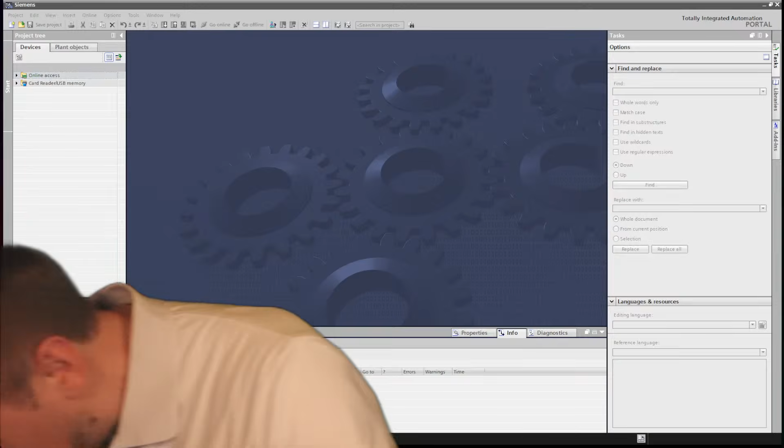Let me take notes. I don't really use it that much, but I do have a little notebook here in which I will now take notes of attendance. This is like if I do programming or HMI design or such, you can't see it because of my green screen. Let me do the green screen, I don't want to fiddle with it, this will break everything. Oh there, you could see it. I do take programming notes on there, and I make plans, like class diagrams and stuff. This is my little notebook here.

Watching from Berlin - hey, that's not far away. Everything okay now, perfect.

So I do have my little notebook here, I will take attendance, I'll go through the list afterwards and see who's there, which country is represented. We even got Kenya, fantastic. Turkey, yeah, so much, so international. It's all kind of in those time zones. Bangladesh, that's quite far. That's LA, okay, LA is the furthest away. I think we can't get much further except for like Australia or stuff. But LA, that is really far. I've only been in the US one time, for a training that I gave myself, in mechatronics.

Where was I - I passed through Newark on the way, had a little layover in Newark, and then I was going to Pennsylvania, Pittsburgh. Good times. Paderborn. Ah, Rwanda, so much Africa, that's pretty cool. I also see French, I've been to France a couple years ago, to Paris. I tried speaking French but my French is really terrible. I had a very bad grade in school in it, so I'm not going to try and speak any French or Spanish.

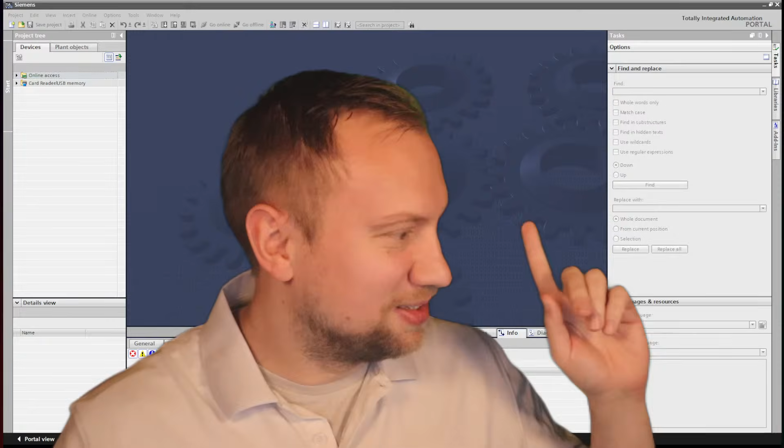So story time - there's always story time in the beginning. So before my time, before I started with PLCs, with automation, there was - I think it was aimed at the Iranian nuclear program, let me see if I don't get this wrong. The only big virus that was ever aimed at... and now we're going into TIA Portal.

Oh, Constantine, I've never been there. India, of course, India is missing from the list - of course, India is represented as well, obviously has to. Is that going to work?

Yeah perfect, I don't want to show you my... I mean it's okay, why, where did - what did I just break? Oh my goodness, yes, of course, Stuxnet, that's the one I want to talk about. It was Iran, right? United States, Israel, it was aimed at.

Some said it was a political virus developed by a government, and I think it was official that the US government aimed it at the Iranian nuclear program.

Stuxnet was aimed at the Iranian nuclear program. The very sad thing is that it's the only known virus for PLCs, the big one. The unfortunate thing is it always gets related to Siemens Step 7 software, so it's not TIA Portal, but the older PLCs. I'll do programming in TIA Portal very soon, but...

Story time started here. The very fascinating thing is how Stuxnet was actually organized. Let me take Paint to take notes and stuff. Paint is perfect.

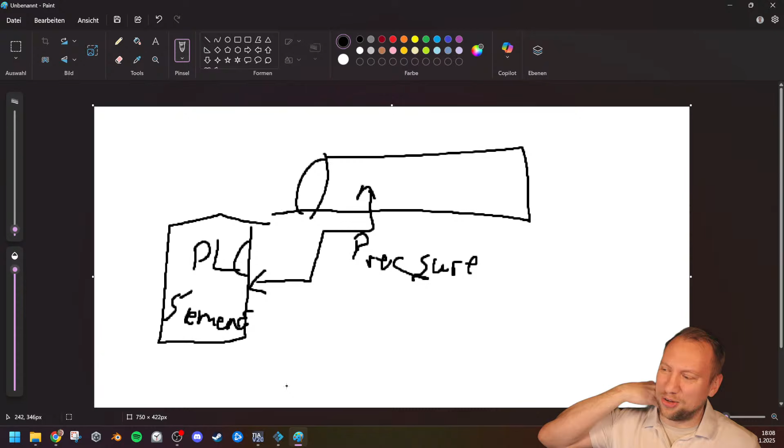I don't know the movie, but if you Google Stuxnet, the virus, you will find a lot. The Wikipedia article is pretty huge, and it's all about one of the biggest, or the biggest, PLC virus, which was specifically aimed at Siemens PLCs, developed by the Bush administration.

It's literally well known nowadays and well documented that it was political, pretty much cyber war. Fascinating, very fascinating things. Good.

That is why you should always keep your firmware and PLCs up to date. That's why there's an update every now and then, a safety update. It's not always just safety, it's also features, but that's definitely something that happened in the past.

Stuxnet functioned by targeting machines using Microsoft Windows through the networks, and it was brought in using USB sticks, and it was so easy. Nowadays, of course, with all the cybersecurity, it is much more difficult.

The worm infected over 200,000 computers. Goodness gracious, this was great.

So we've got Tunisia zooming in. Mexico, we've already had Mexico. Egypt, perfect. Good evening, everyone.

Yeah, so this is not the main topic here, but that was so fascinating, I wanted to read more about it. I watched the documentation, like an hour, or maybe 45 minutes. It was pretty good. Interesting stuff.

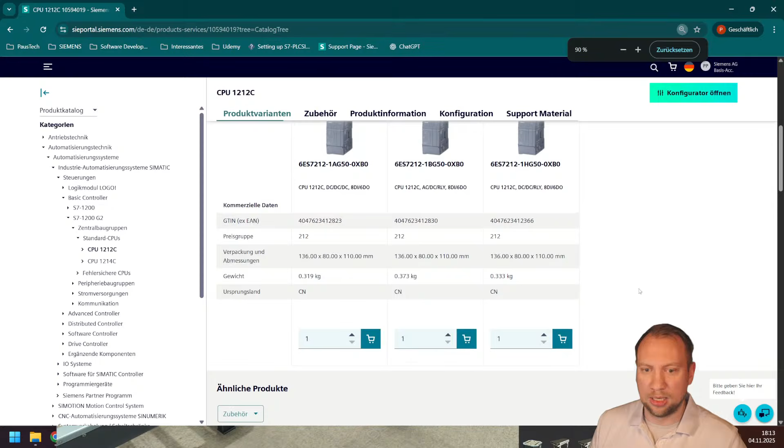I don't know, let this charge first. There we go, is this with pricing? Why is it so zoomed in like crazy? No, there's no pricing because my account is kind of suspended. Not suspended, but it's not really there. But the newer PLCs like the S7-1200s, you can get for a cheap price, right?

G2, let's get a G2 starter kit. They are not as expensive as you might expect. If I look at this, for example, a starter kit, I can get a starter kit for like 300 euros. Of course, we all have different currencies, but 300 euros, that's like, I don't know, half a cell phone here, right? And this includes TIA, the basic TIA portal, an HMI screen, the PLC, some basic electronics, as you can see there, and you can get that quite cheap.

Yeah, Siemens is nowhere as expensive as Allen Bradley. Yeah, Siemens can be expensive though. The most expensive thing for Siemens is that there is this bandwidth. An S7-1200, you can go for the cheapest if you want, 200 euros. That's, I don't know, that is me inviting my family to dinner once, and I could buy a PLC instead, right? The most expensive ones are like a high-end car or a medium-end car, like an Audi or so here in Germany. So there is this bandwidth, you just have to know what to choose. But Siemens offers a load of bandwidth.

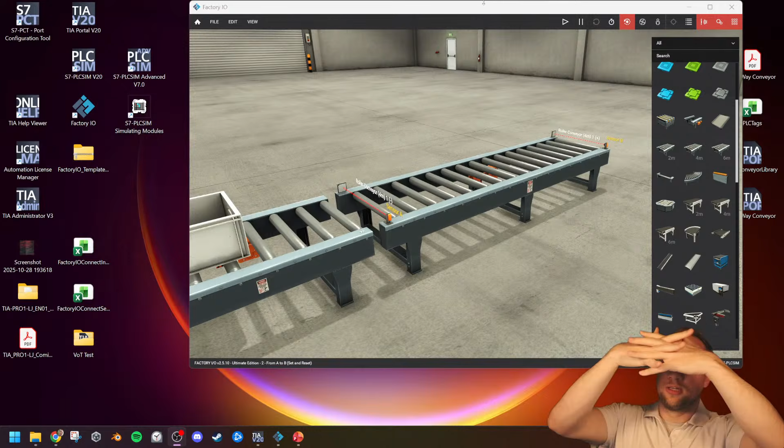Siemens tries to incorporate everything in one software, which I will show. It's quite nice.

Can we change Factory IO with CoppeliaSim? I don't know that one. There's Simit, but I don't really like Simit too much, personally. It is good, I've worked with it quite a bit, but personally, for education, I don't like it too much.

Okay, so here for our system, I want to show you a couple of little tricks. We have this, right, a simple roller conveyor system. How is this thing called? It's a roller conveyor system.

Advanced is just for 1500 controllers, yes, it doesn't exist for 1200s. So this conveyor belt right now can't go forward, can't go reverse. I can manually force this in the software, but manually forcing it is like short-circuiting it. Of course, that's what our PLC should be doing. Nothing exciting, right? This is right now not doing anything exciting. It's cool, it's a cool software, it's a very simple system.

What I want to do, inside of TIA Portal, I've got a couple of projects set up to test this out. Nothing is going to work. I want to actually open up an existing project from my desktop. Where is my desktop? There it is. So I'm just opening up the project that's there for this.

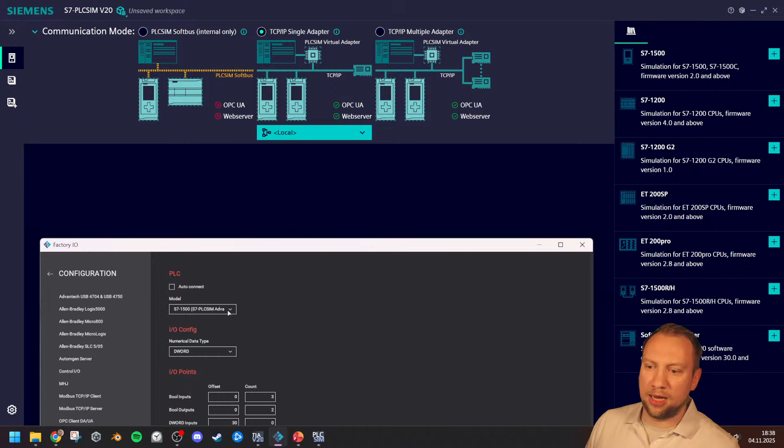Now, if I choose PLC Sim Advanced and do PLC Sim Advanced here, they will just communicate, no problem, no fix necessary, very nice even. This is new. If you only have PLC Sim, the normal version, you don't have that. Now, on the other hand, this is also the main feature of PLC Sim Advanced. This is interesting, definitely interesting.

If I have PLC Sim Advanced, you can see that I have this option of 3 different adapters possible here, of the online access. And fascinating, what you can see is if I change this in PLC Sim Advanced, it also will change in the normal PLC Sim version. This is quite fancy because I'm changing the global network communication for all of my TIA components on my PC.

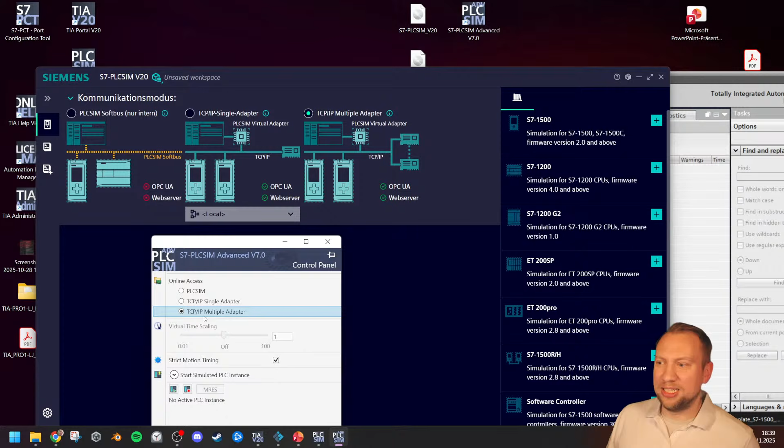Which means, and this might now be interesting for Arnaud, this is probably new. This here, I don't cover this in any course. This is the first time I talk about this. This means I do not need PLC Sim Advanced anymore. I can close this up, and I can now also, I will have to click on the exit button here.

I can now do everything here within PLC Sim, which is great.

Have I ever dealt with PCS7? That was my first Siemens software that I worked with. Yes, I worked as an engineer with PCS7.

PLC Sim version 20 runs with PLC Sim Advanced, yeah. But that was my big problem yesterday when I was setting up everything: if you don't have the PLC Sim Advanced license, TCP/IP single adapter and multi adapter, you cannot choose them. They're grayed out, you can't click on them. This is license gated. So this is PLC Sim Advanced now, like it has been integrated here, which is pretty cool.

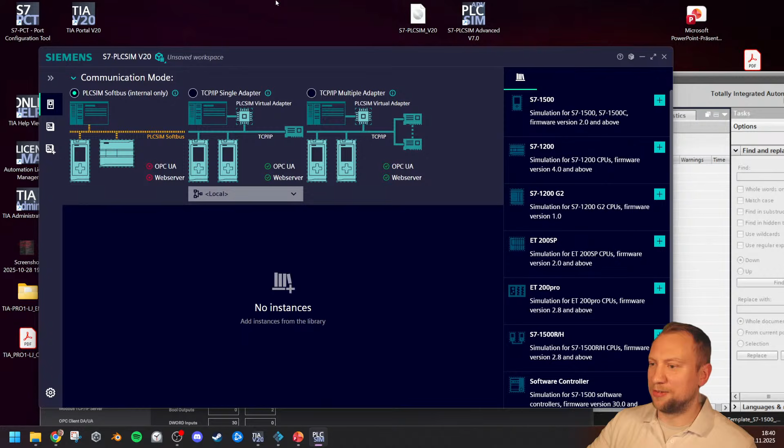They changed the interface of PLC Sim. They are working on this, integrating more and more things into it. But now I kind of like the state it is in right now.

If it doesn't have any bugs, which it does. I experienced some yesterday when I tested everything. So now I do have this like...

PLC Sim running here, right? I do have this, and I just want to connect it to Factory IO, which is now... I will actually close PLC Sim for very specific reasons. I do have set my Factory IO here to communicate as S7-1500 with PLC Sim version 20 or newer.

So I want to connect. If I click connect, PLC Sim isn't running. What I have to do is select my PLC, and now I will run PLC Sim from within TIA Portal. Selecting the PLC I want to simulate, and then clicking on the Start Simulation button up there. And yeah, because I'm simulating, and this is...

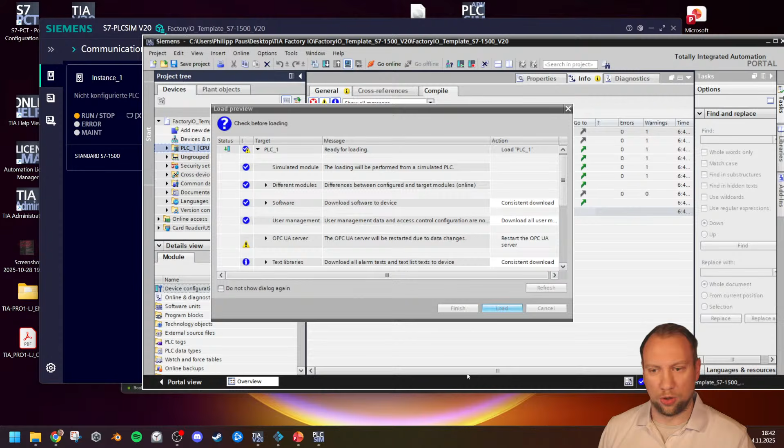And now I can download my PLC here. Sure, so there's nothing new, I didn't explain anything, I was just downloading a PLC program. There, hey Shepard, hi. And I will also start my PLC, so you can now see it goes to run mode. And now, very, very fascinating.

What I think about digital twins and virtual commissioning: we are not... they get more and more important, but I think there has been too much investment in it. It's good topics, important topics, but too much focus is put on it. From my perspective, it is good.

Downloading the program before? Nah. I could have also created the instance here manually. Yeah, that would have been recommended, especially if you have PLC Sim Advanced. But this is the way that I do it right now.

So if I now click connect, it will still not work, I think. Yeah, because as I have said, if you've been listening, you know that this external tool, Factory IO, cannot communicate into the PLC Sim softbus here without any fix, without any problems, without any issues.

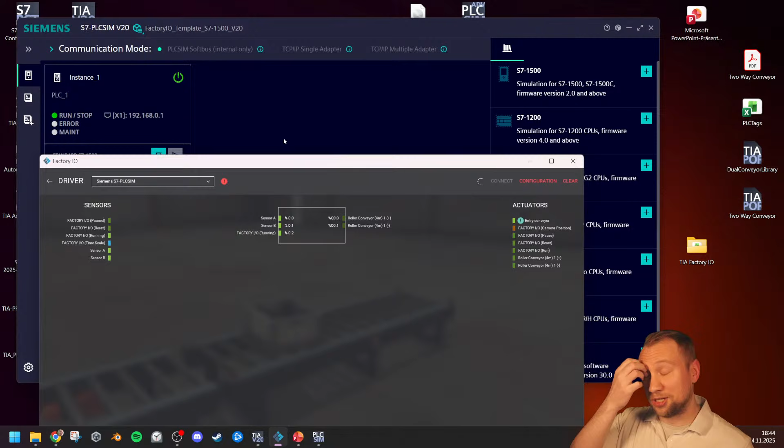What I could do... yeah, digital, it depends on, it's a whole different topic. Digital virtual commissioning is a whole big topic. It's cool, it's fancy, and there's a lot of money in it, but to do it efficiently, you don't really need that.

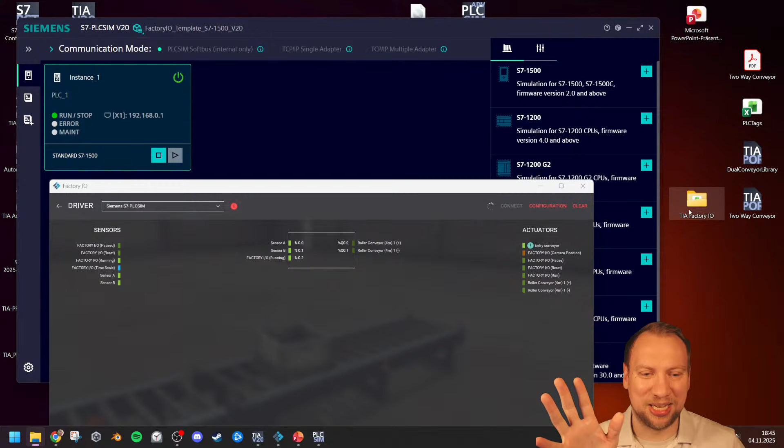Which it can't, because the softbus is not open. Now I don't know who found this out, I tried to find the solution, but there is a very, very funny thing for me that Factory.io can do. And it is this, and I hope I am doing it correctly.

You can download this from the Factory.io site. There is a connect sequence, connect in and out variables, and a connect sequence which I will need to import, I think, first. So the first thing that I will do, and I hope I do the process correct, is into TIA Portal. I want to import the tags here from Factory.io.

And cool feature, oh, they are auto imported.

So they've already been imported here. I will show another feature later on. So I would need to import those tags to TIA Portal. And it's already happened there.

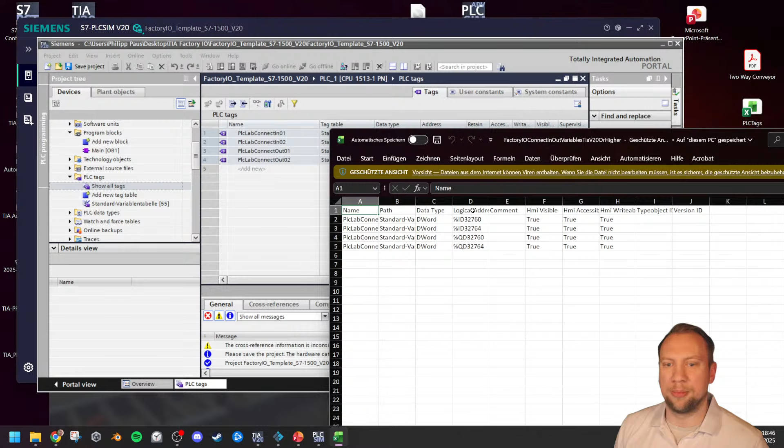They are already there, and I literally do not know what they do. I don't know why they're there. They are somehow on an input double word, 32,760, and on very high input double words. I don't know why. I don't know what that's going to do. Is it FC9000?

If we would go directly with TCP, it would be working. So I could easily set this up with PLC Sim Advanced, no problem. And the very fascinating thing with this, if it is FC9000 or SFC actually, then I would have to read - then I can find myself into it. That's a good hint, I'll look and see if that is what it is.

Now, the very interesting thing for me is I will have to - we didn't import it, I'll show you how to import tags in a second. One cool thing that I don't know what it is - I didn't work with S7, with S5. I'm too young for those, not too young, but I've not been around in engineering for those.

What I have to do, and Factory.io supplies this - all of this is not too important, but it's very fascinating for me. They provide a sequence. Now this sequence, I don't need that. All of this is not necessary for PLC Sim Advanced. There is this sequence - in this sequence, if I press play, it will turn the input peripherals and the output to those values.

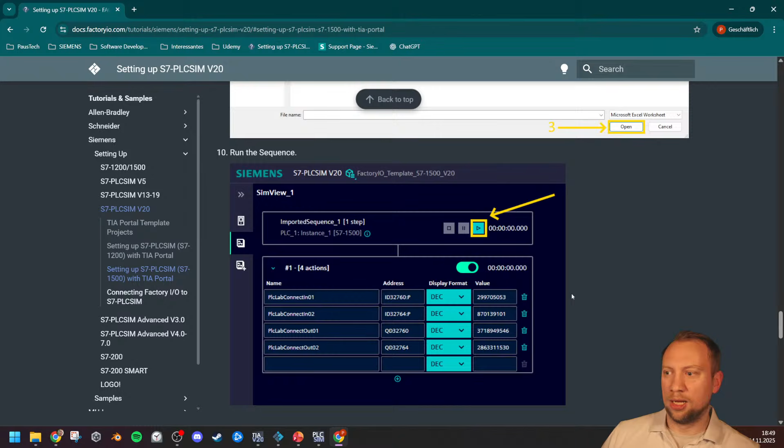So all of this is described in - and that's not important because it's Factory.io specific. You don't really have to use Factory.io. All of this is documented, and I just followed the documentation when I tested things, right? And that is a learning factor - a lot of times, I have to also follow scripted documentations. Like documentation, press this, press that. I don't know, sometimes we just have to.

Can I take a look at the value converted in BCD? Yeah sure, I can - like string doesn't help much, but let's see. BCD you say - yeah sure. If I want to look at those values, let's import them into a watch table and then we can see if those numbers mean something to you.

Why can't I monitor? There it is, there we go. I mean hex, right? You want BCD? I don't know, can I not change this to - I thought I can change it. I can change this to - there it is, BCD.

Does that ring a bell, Arno? For me, it is complete. I understand it works - it opens somehow this back door in the simulation. Looks like magic numbers. Yeah, exactly.

No, it works, right? And now, as long as it works, I don't mind, right? I've tested this. Now we do have the PLC sim connection here up top there, I can see the check mark. And now let's get - so PLC sim, right? So we talked about PLC sim simulation here.

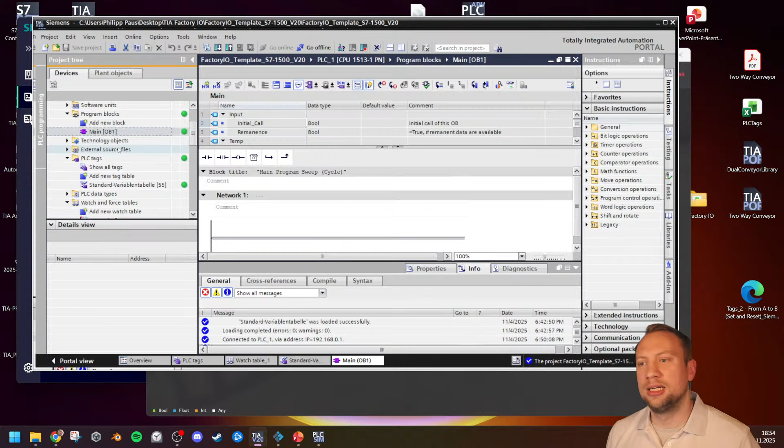Now what I can do, if you want to import tags from external software into TIA Portal, it's very easy. Inside of TIA Portal, I go to show all tags, and there is literally an import button on top. If I click import, I can now import those tags. On my desktop, you don't need to see what's there, but I have a lot of nonsense there - this tag list. And now I have imported them successfully.

Easy as that. Edge wants to be relevant. Edge is an okay browser. If I wouldn't be used to Chrome and wouldn't have everything on Chrome, I would probably be using Edge. It's an okay browser.

No, we don't need the communication function block anymore. That was an old thing. Now with version 20, we just need those tags, we turn them on, and it works.

How else would crypto get mined? I don't even want to think about how much crypto got mined with my PCs because I always go on sketchy websites and I just don't care.

Anyway, I might be your hero. Why do you have PewDiePie? Is that PewDiePie as your... it looks like. Do you look like PewDiePie? Looks like your... what's it called? Your faceplate? I don't know how it's called. Your icon. Kind of looks like it. But it's very, very tiny for me as well.

There we go. Now I have imported those tags. So we have very simply exported it in another tool and we can import this here inside of TIA. Extremely simple. How difficult are PLCs? Depends, but I would say they are pretty easy.

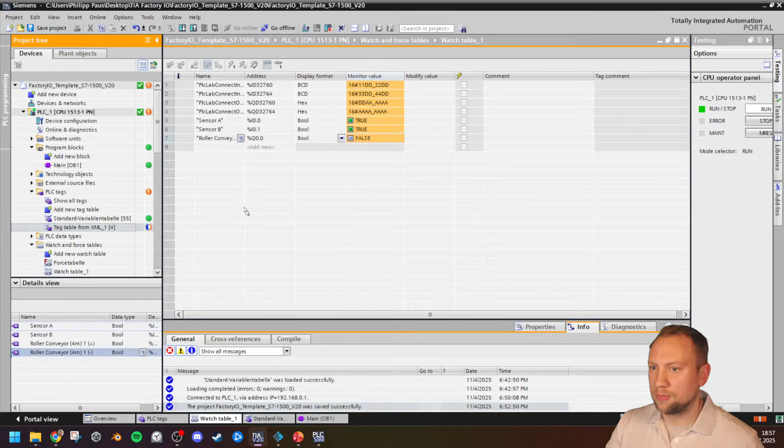Where are they in my tag table that I've imported? I can just pump them in here. Now I can control my system directly with this, all without downloading the PLC even once.

If I double click here... now my screen is, by the way, I usually use my screen in a not so zoomed way, so I'm not used to this. Or double click doesn't work. Right mouse button, modify to 1, modify to 0. I can control the conveyor belt directly from here, easy peasy.

Faceplates are pretty cool, yeah.

I'm not electric, I'm an automation engineer. My background is electrical engineering, my degree is in electrical engineering, but I somehow landed in automation. Or I would even say nowadays, I landed in education even, with some, of course, engineering background.

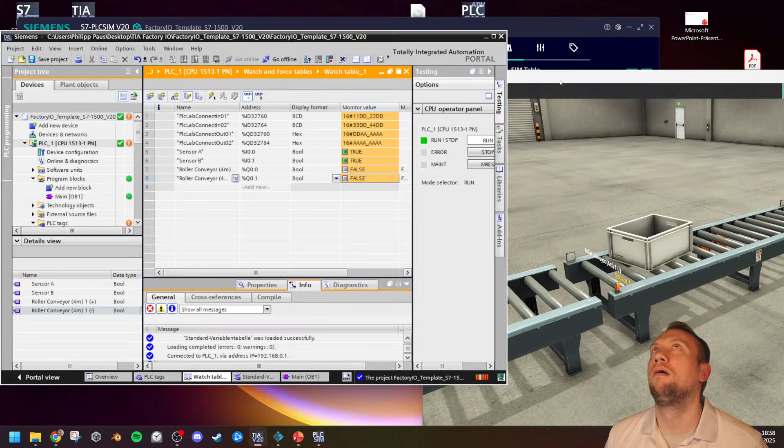There we go. So now I could program this, right? The conveyor going back and forth or something, which I don't want to do. What I want to do, it's not going to work. I didn't test it. Maybe it will work. Let me test something. Because right now, what I want to do is an additional thing.

And it's going to be our second big topic now that I haven't talked about, that I haven't started, which right now we have this. What I want to do is, so we're currently using the sketchy backdoor. I want to do something else. I want to switch over to PLC Sim Advanced. Now, what I want to do with PLC Sim Advanced, I want to connect this to another software.

And I'm going to read the chat there again in a second. Sorry, I'll be with you right in a second there.

It's pretty new, it's very cool, something called VoT, the view of things. A VoT application.

Let me see. The view of things, which is going to communicate with PLC Sim Advanced, which is not 100% correct. It is going to run inside of our PLC. So it's going to be a part of our PLC. It belongs to the PLC hardware.

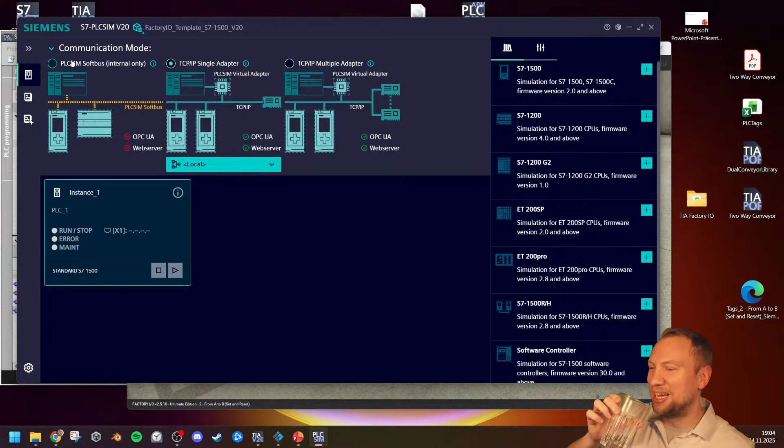Yeah, but this is why I can't use this. I have to use the standalone PLC Sim Advanced.

It should be available here, right? This should be available, but I don't know why I can't. Wait, oh, there's a different one. I found it.

Maybe this works now. Oh god. I selected the PLC, there's the license type. Do you want to run a standard PLC? Do you want to run an advanced PLC? Oh god, I tried this for like 20 minutes yesterday and couldn't make it work.

I've paused it, it's just... you're currently working with a trial license. I know, it's okay. Oh no. Okay, we will try this.

I can't believe it. I thought it would automatically detect if I use TCP/IP single adapter, and automatically detect the correct license type. Why doesn't it? Yeah, exactly what you said. That should be an automatic selection.

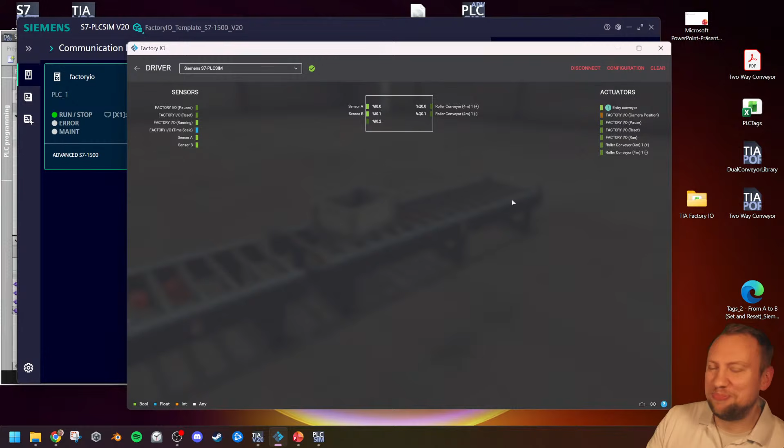Right now, Factory IO is communicating with PLC Sim Advanced, and I didn't know. So yes, we don't need PLC Sim Advanced anymore. It's integrated here, you just have to choose this frickin' license.

Yes, pretty much, if you don't have PLC Sim Advanced, you can. An HMI can also be simulated to use the same simulation bus as the normal PLC Sim. That's correct, but you cannot use an external HMI, like a physical real HMI, for it. But a simulated HMI will work fine.

Should work. Now let's see if my network communication still works with this. I think I need to re-download and reconnect because now we're not using PLC Sim. And that's actually an important thing — we're not using the PLC Sim simulated internal network anymore, we're actually using the virtual Ethernet adapter, the real physical adapter. I do hope this one will now work.

I'm going to show all compatible devices, search the network. We'll see. Yeah, the name of your PLC Sim — if you're using PLC Sim to communicate with Factory IO, it has to be named Factory IO.

I don't know why I even know it, but yes, it has to be. This is so stupid. Backdoors and backdoors and backdoors everywhere. Oh, goodness.

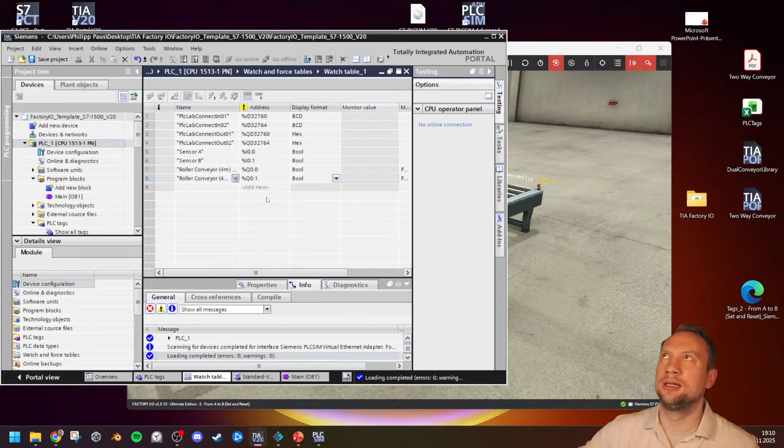There are many issues. That's why, just for a student and for learning, PLC Sim and the HMI simulation is fine. For engineers, you will have to go with the advanced versions. You want to go with those.

PLC Sim worked, but it cannot connect to Factory IO. The Factory IO connection needs the name Factory IO. Everything else worked, but not the communication with Factory.io. This is somewhere in the documentation. I don't know, it's stupid.

Okay good, now that we have this and everything is connected through a physical network, right? Inside my PC, there is this physical network that is really a network right now that is communicating. So I could also have an external HMI now, and this external HMI can communicate with PLC Sim Advanced and also with Factory.io, right?

By the way, that is one of the reasons why I have never really continued with my factory simulator software, is the networking is a pain in the ass. Setting it up and using it, like getting the right protocol, is very, very difficult. I try to find better ways than those stupid workarounds. And you see, even Factory.io, they make millions a year by selling the software, right? Even they couldn't find a better way than this.

Yeah, it's a shit way to do it. Yeah, I agree.

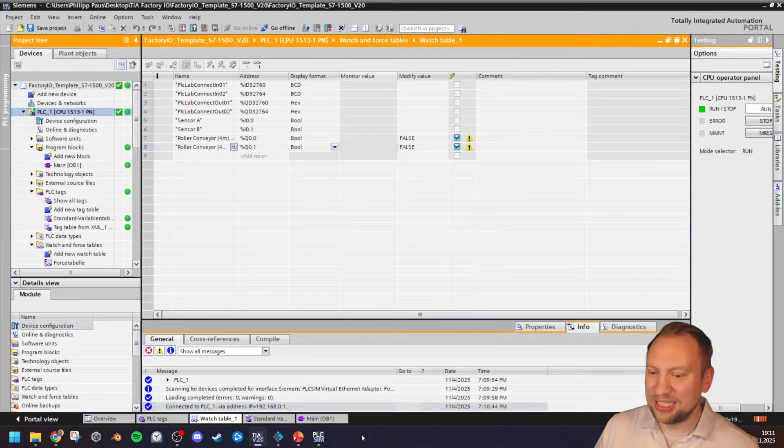Yeah, exactly. The instance name of the PLC Sim Advanced instance has to be named Factory IO. Don't know why, that's just how it is.

Okay good, now the main topic. So second big topic started, or third, fourth big topic. Let's see, the real interesting topic now, like everything else also interesting, it's just expert talk, right? Is the following, and that is what is a really cool feature now of newer PLCs.

Now, the first thing that you have to be aware is that your PLC hardware has to be newer than firmware version 3.0. So this one right now is version 4.0, so it is available, right? And it is this feature here, web applications. If I would change this, which I will not do right now, to a firmware version of 2.0 for example, the web applications would not be here. This is available at 3 and higher.

Inside of the web applications, what I can do is create a view of things application, a VoT, which I asked ChatGPT, do you know what VoT is? And it gave me a completely different name, but I know view of things from the official Siemens documentation, and I was like, yeah, there it is. You see, it automatically creates this view of things, which is an HMI. This HMI right now is inside of the PLC, as you can see. We have the PLC, and it is part of the PLC right now.

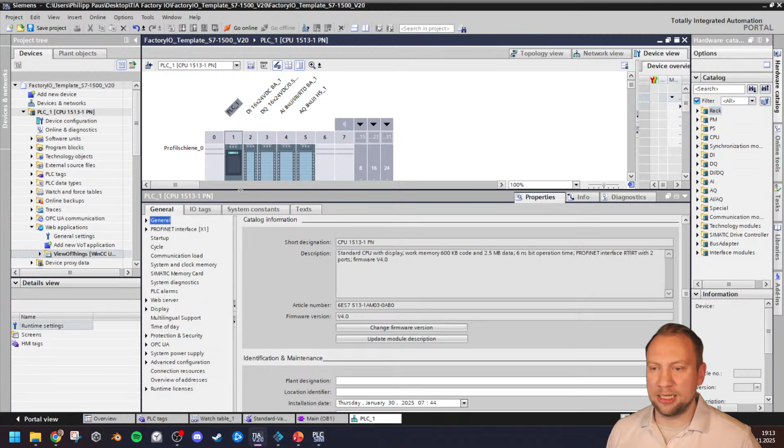So this view of things application is now inside of the PLC. It's not inside yet because I haven't downloaded or compiled anything, but it is a feature that we have inside of the PLC. Now, what I want to do in there is add a new screen, like an HMI. This is like an HMI setup, WinCC Unified setup though. If you have never touched WinCC Unified, it is a little bit different than the standard WinCC.

That sounds complicated. It kind of is, but also kind of isn't. So what I want on here is quite simple: I want 2 switches controlling the motor forward, motor reverse. So we're not talking about HMI too much, right? But I want to have 2 switches. Where is my text? I put text on there. Forward, and also a reverse.

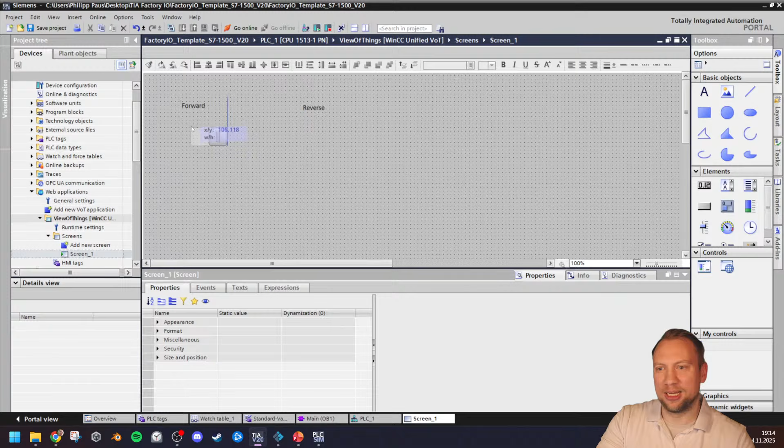Nothing really exciting, right? Now those 2 I want to link to my PLC outputs here, so my PLC tags. I have to be aware that those PLC outputs, forward, reverse, have to be accessible and writable from the HMI side of things. Not HMI, but actually this uses the web API, so it's really a web application. So now I can use them on those buttons, on those switches.

So I want to have this, and then the switch state, right? The switch state is controlled by a tag, and that tag is, of course, if I have forward, I want to have PLC tags, the forward, the plus. Nothing crazy here. I set up an HMI screen. This HMI screen has 2 switches. This switch here is displaying and controlling the switch state by a tag, and it's the plus tag, so motor forward, so I can directly write on the output. And this one is going to do the same thing with the negative tag with the reverse.

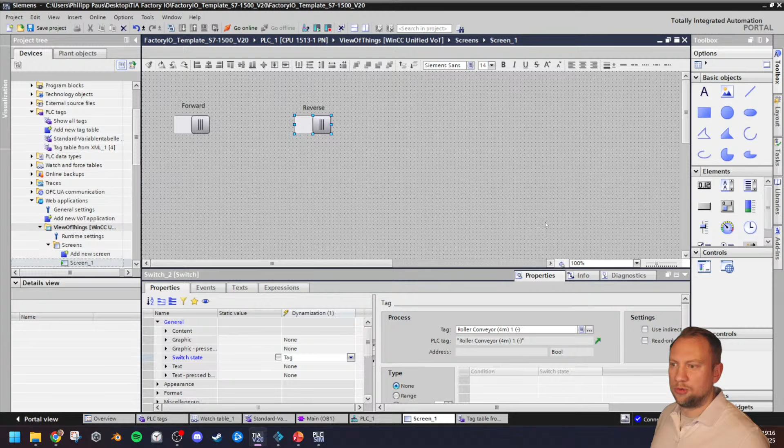Is it cyber securized? That's a whole topic in itself. But yeah, it is, using OPC UA. It is as safe as networks can be, pretty much. They have done the same with using web source. It is the only logical way nowadays, I would say.

So we've got this now, right? Those should control the motor going forward and reverse. Now, for the view of things, and this is what I do not like, you might expect this is now part of the PLC, so obviously, if I download the PLC, it is going to download this feature as well. No.

Absolutely not. It is seen as 2 devices, so to say. So we have to download, yes, but we have to compile the HMI itself, and we have to compile the PLC itself. So before I can download the PLC, there will be - no, view of things is also available in earlier versions. It has to do with the firmware version of your PLC.

Now, if I download the PLC here, it will actually give me an error. And let me see - when you simulate the PLC, you'll use the PLC sim virtual adapter. Yeah, exactly, Marcos. That's if I do use PLC sim, but I'm right now using PLC sim advanced, so I'm grabbing into my network adapter.

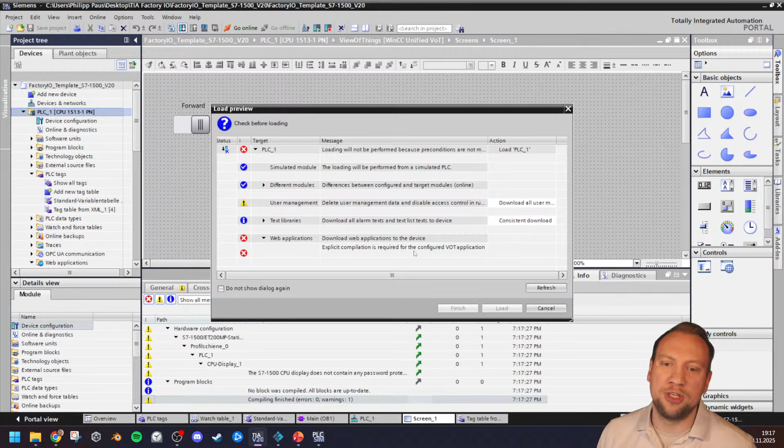Yeah, there we go. Look at this. Like right now, the web application - explicit compilation is required for the configured VoT application. So I actually have to go in there and compile. It's up there. I usually press the button, or right mouse button compile is also possible. Right mouse button compile, rebuild it all. I'll have to do this every time I change something on this HMI.

So it wants to be treated as its own software part, as its own device. I don't really like this. It should just give me the option when I compile the PLC. However, it's fine. If that's how Siemens decides to do this, at least it gives me the info. Yeah, exactly, logical controls. WinCC Unified has advantages. It is great, actually.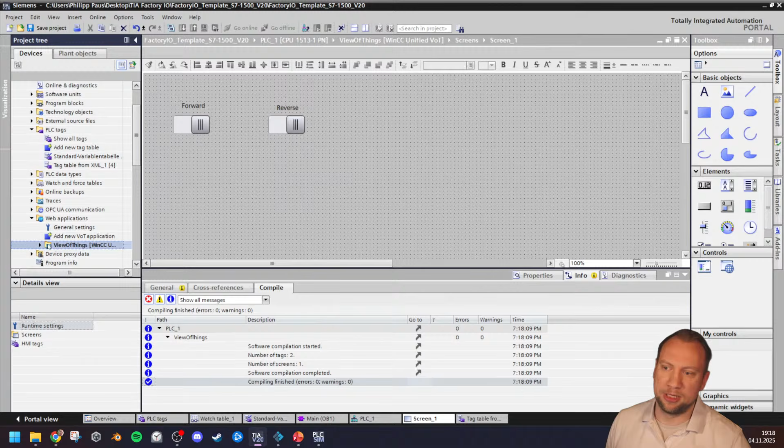Now with this view of things application, right? Now I have it. The one thing that I still need to do is on my PLC, I still need to activate - where is it? The web server, which is a hardware feature of my PLC. I have to activate the web server here. Security note, and of course, cybersecurity - it lowers the security. Yes, that's the hint there.

Now in this, I want HTTPS, sure, why not? I don't mind. I still need to do one more thing. No, is it? Oh, God. Oh, goodness. Yeah, it's a different thing. I still need to do one more thing, which is really annoying. A huge difference. And now I hope I don't break everything. I will, most likely. We'll see.

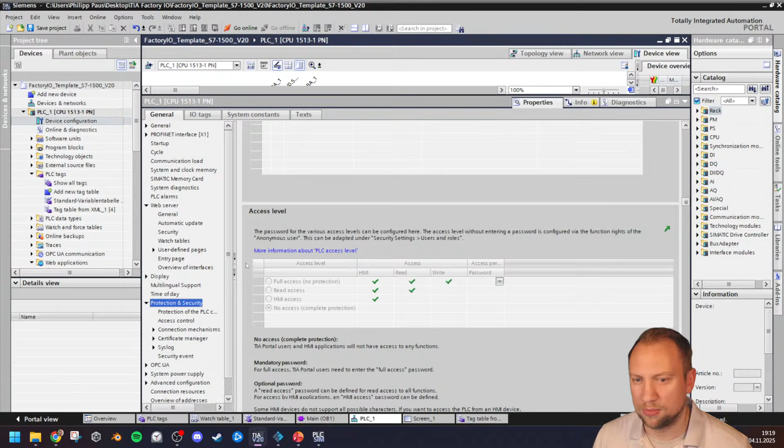Let me check one more thing that I wanted to. Wait, no, it's in protections. I'm stupid, it's in a different tab. Oh, yeah, different. One more topic, right? Which belongs - it all goes together here.

So we do have now the HMI here, which I will download, and then an external browser can access this, theoretically. Now this external browser, I'm scary? You say I'm scary? I'm not scary. Boo.

So now, the problem with this is we will need—not a problem, actually it's good—we will need access rights to this. We cannot just penetrate into the PLC here, that's of course not possible, all of this is protected. What we need is the access right to go in there and work with the HMI, which is a web application. So we need the correct rights to access the web server application.

Now those access rights, I could make a whole video just about this. But the access rights are an important thing, and they have been changed between versions quite drastically. Right now my PLC has firmware version 4.0, which is how it's going to be in the future. So if you want to be prepared for the future, this is how the access rights have to be adjusted.

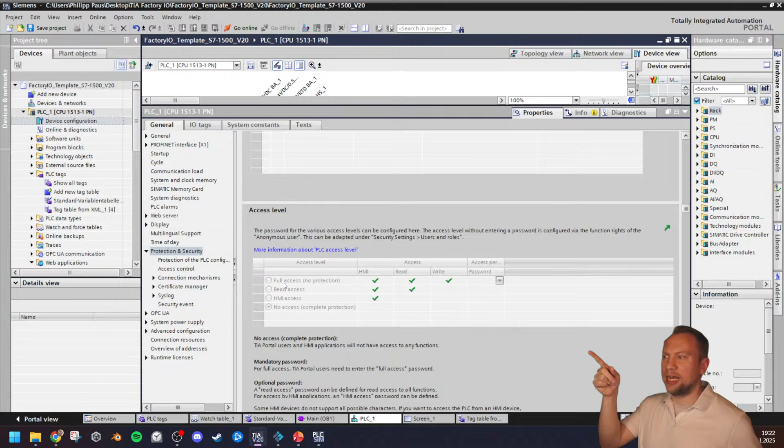So I do have my access level here, and usually if you are familiar with this, in the access level you can choose an access level. I can't—I cannot choose this access level. Starting at version 4.0, the access level is not organized by the PLC. It is organized centrally by your TIA project. So you're going to make your users not on the PLC. Usually before, you would have created a user on the PLC, and the user would have access rights. It's easy, it belongs to the PLC.

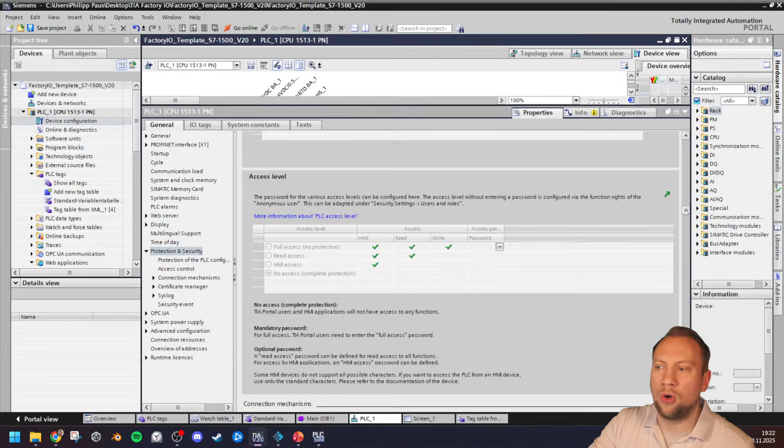Not anymore, right? The access level is controlled here. You see it in the security settings, users and roles globally—globally for all of your PLCs. So I will have to go on there, and now globally for all of my PLCs combined, I would have to create a user. I will call this user Philipp.

It's a local user, right? Local—there's a whole server system behind this that we could use, but let's not. And I do have prepared this password, 123 exclamation point. And this password I will copy and paste in here.

Now this user can go in there, and this user can—if I want this HMI to run, of course they have to be like an HMI operator. But I want them to do more, like me myself. I want to look at everything, so I'm just going to give myself the full rights here.

Now, whenever I download the PLC, I will download this information, which is not PLC information—if you see this here, it's in the security settings, it's global for my whole PLC project. Now this is a big difference between the versions. This is how it is going to be in the future, and I like it. I like having a central user administration.

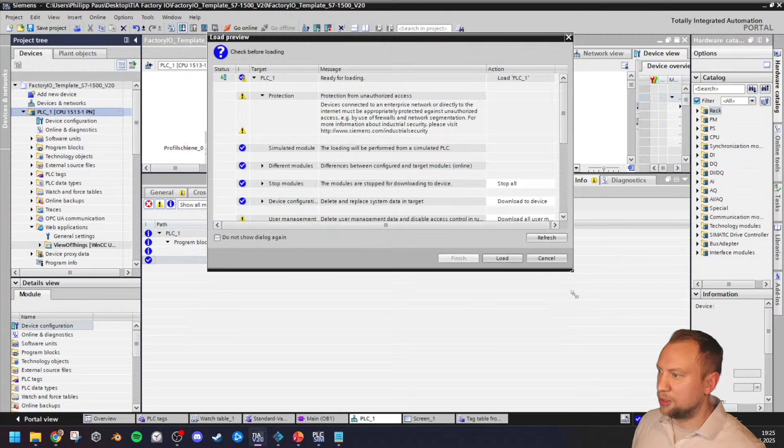Now, this is the most annoying thing when I download something and I have a view of things application. I will have to, and it doesn't really tell me, right?

Have a good evening, Hatux. Don't forget, gaming streams every Thursday and Sunday, right? So I'll see you tomorrow. But enjoy your evening, get some rest.

There we go, view of things. I have to select, and now I have to specifically do this. Every time I make a change to the view of things application, I have to open up this branch, and I don't like how this is. This could be much more convenient, but it is what it is, I can't really change it. Now I will load. This is going to download all of this, including the view of things application, to the PLC. I will download.

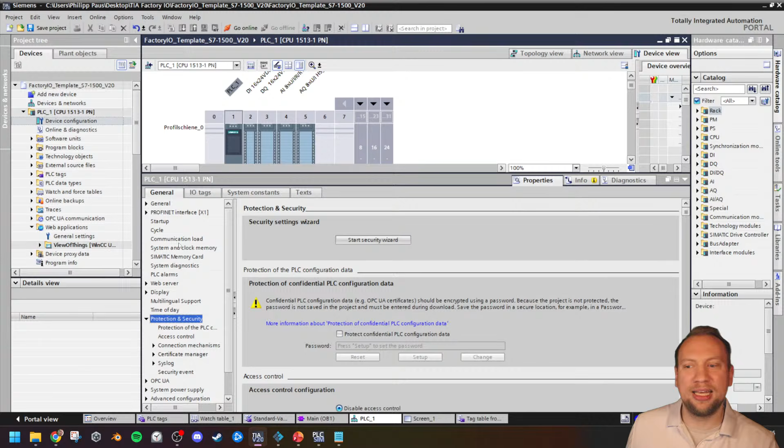I will start the PLC, and now I don't know if this is going to work, right? Because I've set this to PLC Sim Advanced now, which should work. So right now, if I enter in my web browser or in any other device that is in the network here, I could do this on my phone, literally, right?

Nah, go get some rest. You are excused, Tartux. You are excused from class today.

Yeah, it's a lot of steps, not too many actually, but it is quite a bit. Yeah, it could be more convenient.

There was just one more thing that I wanted to check. Dang it, I forgot. Oh yeah, I want to see I activated HTTPS, and I do need my IP address of my PLC. Now I could have a DNS or something in my network, and I would not have to enter an IP address into my web browser, but that's what I have right now. So I need the IP address, which is there. This is the IP address.

And now I can go into my Microsoft Edge, which I've never opened up. So if there is something strange here, it wasn't me, I never use Microsoft Edge, right? So right now in Microsoft Edge, I can enter the IP address 192.168.0.1. So this is the IP address of my PLC, and there's going to be a warning.

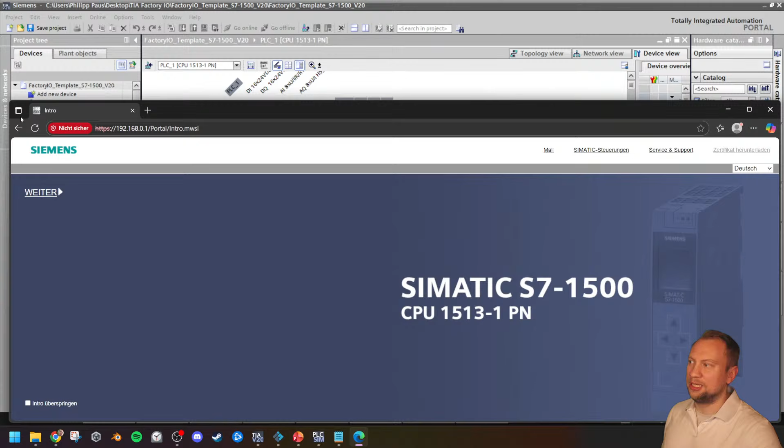It's dangerous, okay, I could go to extended, and I can go onto my PLC. So this is my PLC's web server right now. So I am right now accessing PLC Sim using a web browser. This could be on my phone.

Practically speaking right now, what I could do is I could open up this port that the PLC Sim runs on, route it to my router here at home, open it up as a server, open the correct ports, give you my IP address, and you could literally right now, with the correct knowledge, it takes like 5 to 10 minutes. With the correct IP address, with everything there, you could also access this. If I had prepared this in the correct way, which I would never do because this is my private network, I will not give you access rights to this. You would do stuff with it right now without a password. This is no password needed. Yes, you would. I could set this up depending on network security, but right now everyone could, right?

This can also use routing. This right now is stinking normal networking. It's a web server. This web server uses TCP/IP, right? It uses the standard internet protocol, so fantastic, it doesn't need any magic. This is one of the huge advantages of WinCC Unified. It's unified, we can just use the standards. It is, of course, protected depending on settings, but it has a base level of protection, and we can turn on the protection even further. But however, we could use anything to access this right now. Fantastic.

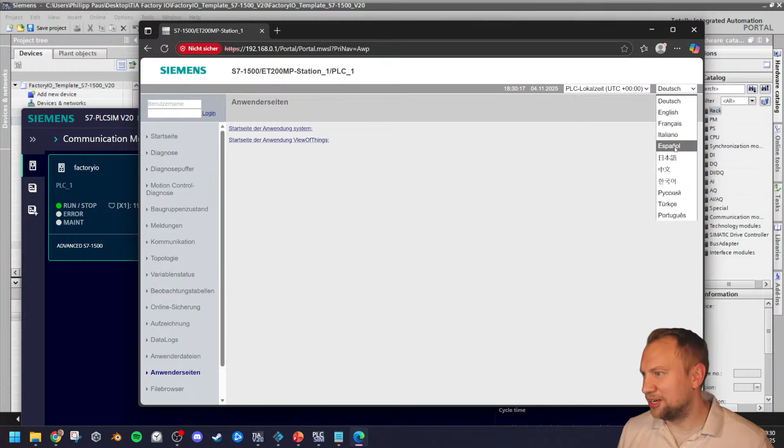French? What language is your preferred language? Korean, Chinese, Japanese, Russian, Turkish, Portuguese, Spanish? There it is, I was searching for Spanish. Espanol, Italiano, Francais, English. I would say let's go with English, right? Translate, and Edge tries to automatically translate it back.

Edge, I just turned this page to English. Why do you offer me to translate it back? Yes. French for you? No, my French is very bad. I can understand parts of it, but not really. Let's have Edge retranslate it back. I mean, kind of okay.

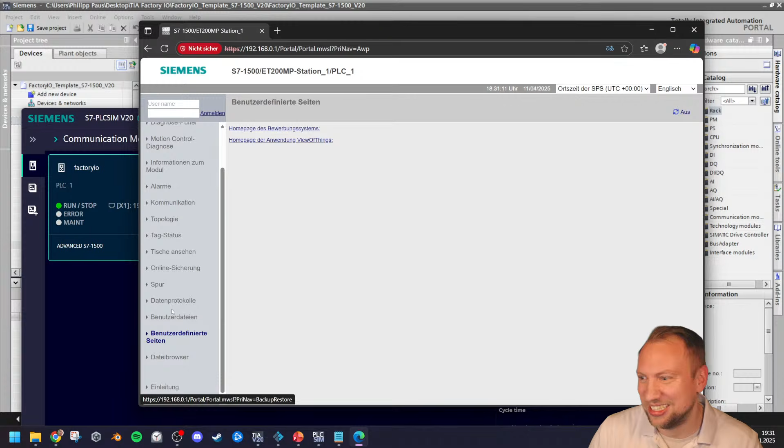Look at the tables, like the tables. Look, we have the desks. Look at desks. Persian? I don't know, I don't have Persian on it. Didn't list me. That's fantastic. No, I don't want this.

Please, original. Good. Now what we can do is, what you see here is the homepage of the application, ViewOfThings, right? And I now need to log in. That's what I made my user for, Philipp, and then the password. That is definitely not password123 exclamation point.

Let me check that password, yeah. I can log in here, and it should... Oh God, why? Provided username and or password may be incorrect. What? How? What? Okay. It's not correct.

Give me a second. What I can already do is I can save this in my favorites. The favorites. Can I show this as a bar? I don't like this. Maybe the name? Did I misspell it? Did I misspell my own name?

That might be it, actually. Philipp is activated, it's a local user, should be fine. Maybe I misspelled the password here. Oh, come on, it can't be the password. That's what gets us, right?

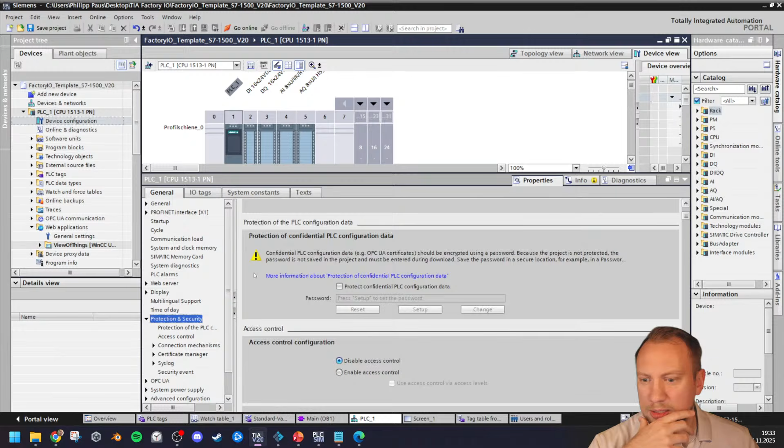If then it is the security settings. Let me just see very quickly. Access control, user management. Oh, there, enable user. Okay, of course.

Do we have access levels? Can I now change them? But this should not be. Oh, and now my problem is a little bit that it is version 4.0. I haven't fiddled around with that user.

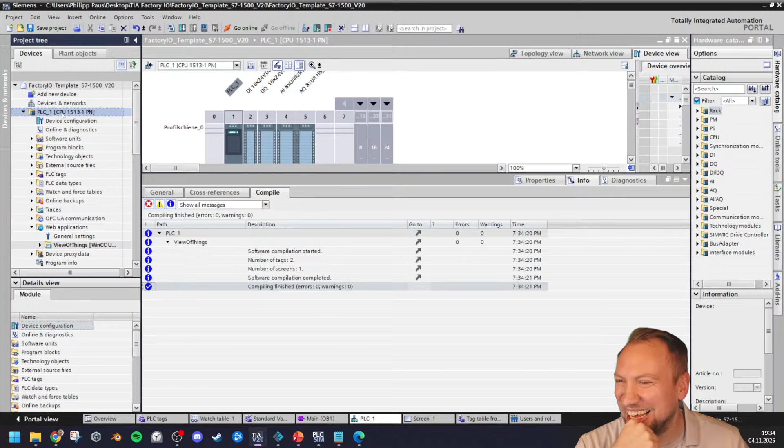Yeah, this might have been it, hopefully. Poor Edge, no, it's not Microsoft Edge. This is me, this is me not having the correct feature turned on. It's not Microsoft Edge, don't you go hating on Microsoft Edge, it's a good browser nowadays.

So I didn't make a change to the web application, but I still updated. Why not? It just doesn't. Maybe copy and paste? Nah, copy and pasting is fine right now, should be fine.

So let's see, now I downloaded with the access. I might need to reload, I might need to get back into the 192.168.0.1. Oh, come on, I tested this yesterday and it should work.

Do not translate this to me. It's not safe, that's fine. I go on, and now I do not have any access rights because I'm not logged in. Let me log in, with of course the password that hopefully works. If not, then I don't know.

What? I'm logged in, that's good. Start page, yes, that's good. That's okay.

I will try this. Oh, come on, why is it the password access that's not working right now?

Let me answer some questions while I think. Is the same login also popping up for WinCC Unified? Yeah, that's the same login thing, yeah. Look at the program, ah Shane, that is always difficult to look at other things.

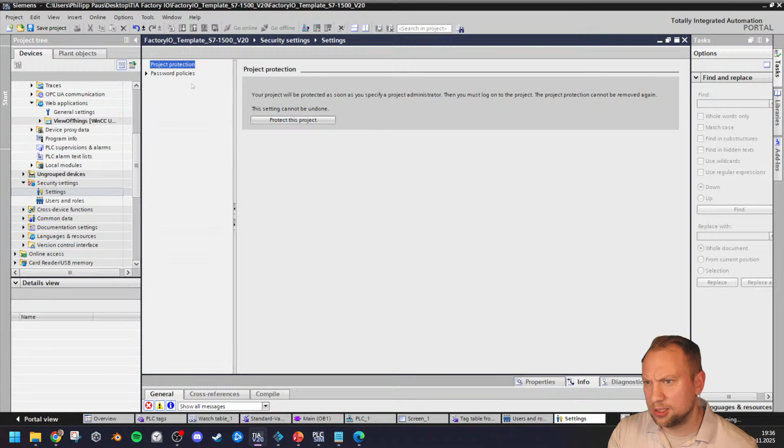Check security settings, right? It should be the security settings, but I was like, no, this should be fine. Protect confidential data - is access control via levels? I mean, sure, why not?

Full access. Okay, I'll get password 123. Sure.

I will just turn it on. I will just downgrade it to a lower PLC level if this doesn't work, to an older firmware version.

Is global security? Sure, why not? Okay. Nah, this doesn't make sense. No, it should work. Yes.

Server certificate, create - sure, why not? Yes, okay. User-defined pages, yes. All of this should work.

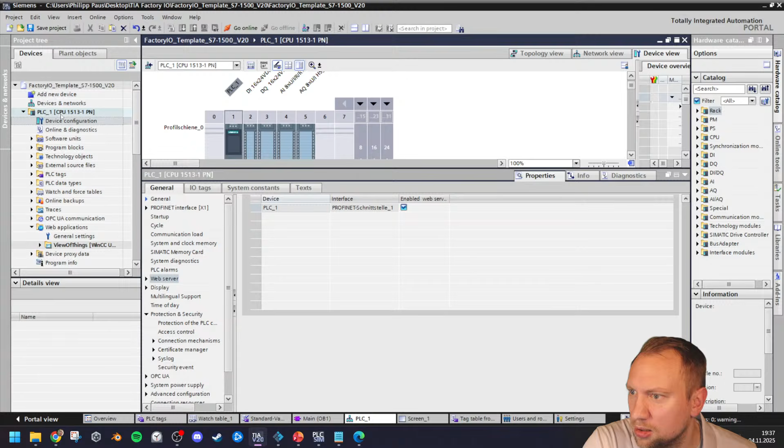What the heck? Try rebuild it all. I can try.

So this is right now me. Sorry, I thought it's the user access control. It should work though. I don't see where the problem might be.

Compile, rebuild it all. Let's rebuild. This is all hardware features. The certificate for... oh, what?

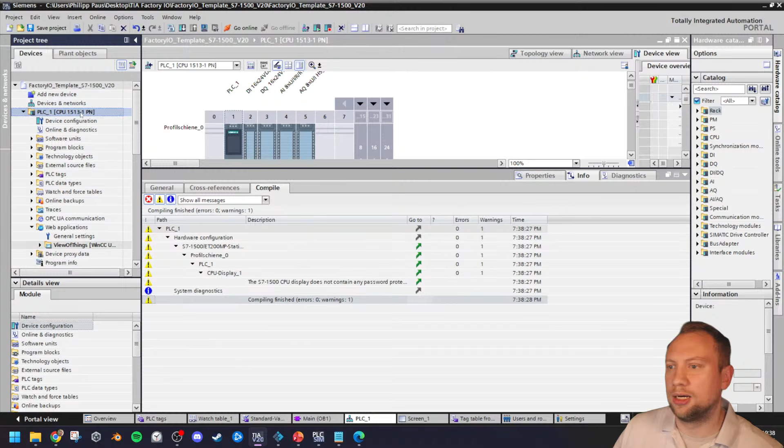No, HTTPS can be on or off, it doesn't really matter for this. Definitely, it doesn't matter. Sorry. Goodness, on the last meter I'm like, oh no, some feature doesn't work. But then I can show something else.

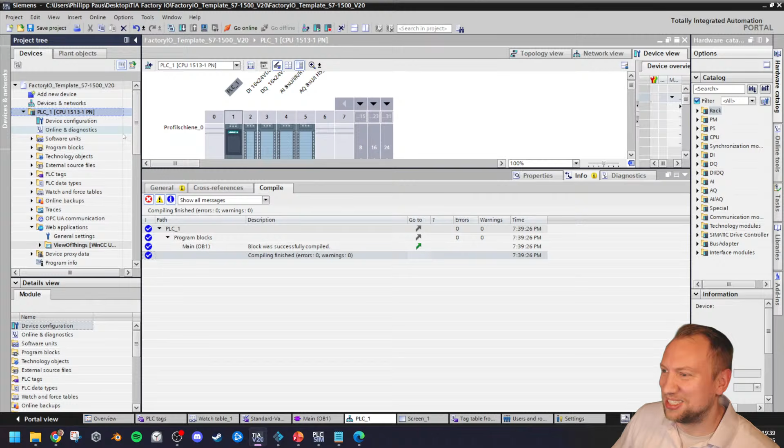I think because I now... let's start the stupid security wizard. Protect confidential data - no, only secure. No. Select whether access to the PLC is protected. When access control is active, only users with access rights after authentication can access the PLC.

Sure, use access control via levels. I don't care. Set up a user with full access to the PLC to ensure that you do not log yourself out of the device. Users and their function rights can be configured under security.

I did that - use local, stored on the device. This is actually quite nice, like that it's guiding me through this. I've never really appreciated the security thing here, but I do now.

Connection to user management server? Nah. Sure, me, I'm the boss.

Access to PLC without authentication enabled? Sure. No access complete protection. And we do have the password there. Sure.

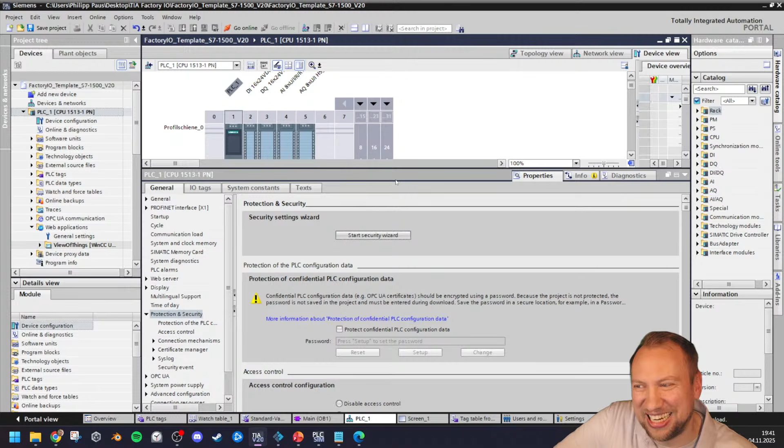Should be fine, right? Good engineers bypass all safety features. Oof, I don't know, I tried. We tried in the beginning. That was the first thing. But that should work, right?

This should work now. The only thing is, if I download now, I will have to enter my name here, and also the password that is definitely protected and not password 123 exclamation point. This should be fine now.

If this is not it, then... I'm just going to cry. That's it, I'm so soft. I'm just going to cry. I'm going to give up. Never stream anything ever again. Just going to sit in a corner.

This I do, if you're right, might be a hardware download. That's right, if you do the download to device, sometimes the hardware doesn't get downloaded. However, if you have selected the PLC here, it does the hardware check and it does download the hardware as well, right? That's why I always make sure that I have the PLC selected. So it should work.

I will close Microsoft Edge, however, because that's the one I'm suspicious with, and I will open up Microsoft Chrome. Yeah, exactly, not Google Chrome or something, Microsoft Chrome. And I will... wait a second. Huh?

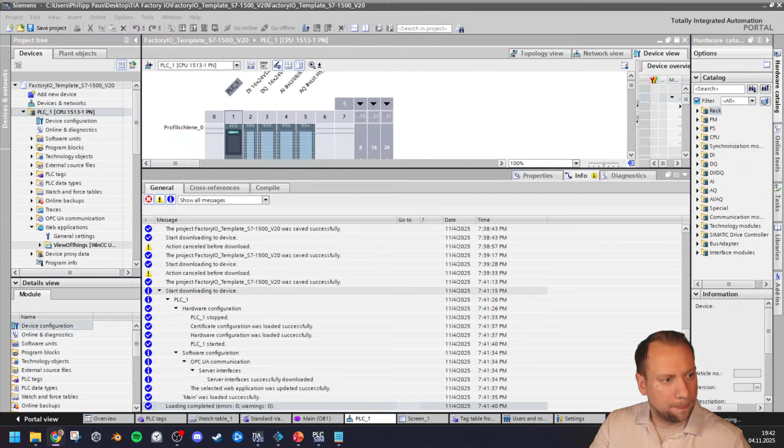It doesn't matter, it's okay. You can now see my private browser here with all of... no, now they're gone. So now I've done the same right here, and I will just switch to English.

I can enter, and now I have to log in. And we all saw a second ago that the user worked. When I downloaded, I had to enter my user data. So the user theoretically works.

Not just theoretically, it practically works. If this doesn't work, then I don't know. It works, it works, is a good... my problem just now is, where are all the things?

May delete the runtime? No, it's nothing like that. It is 100% access rights, so I can log in. That's good. I can't see what I'm supposed to see. And that is a strange thing. This has to do with the...

Password can vary. Yes. No. This is not the help view. I don't want to open the help viewer. Come on, I'm not that bad.

So you see it slowly phasing out. This is, of course, now our test here at the end, if everything works. There we go. Assigned roles, I got that. Assigned rights, assigned user groups. Assigned roles, no, I got all the roles. This is all active.

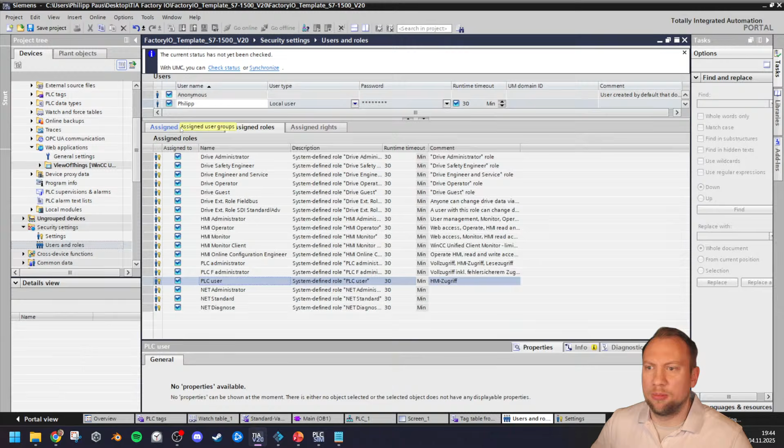Normally it pops up when I build the HTML, but that shouldn't be the problem here. Runtime rights, S7-1500. Yeah, I've got those rights. I do have all the rights.

Synchronize? No. So this should work. Right now, what I can't see is the web server access. So right now, all of this works. Enable access control via levels. No.

Just give me a second. Sorry, I tested this with firmware version 3.0, no problem. If it doesn't work in a minute, then I will switch back over to 3.0. Global security settings, yeah, it doesn't matter.

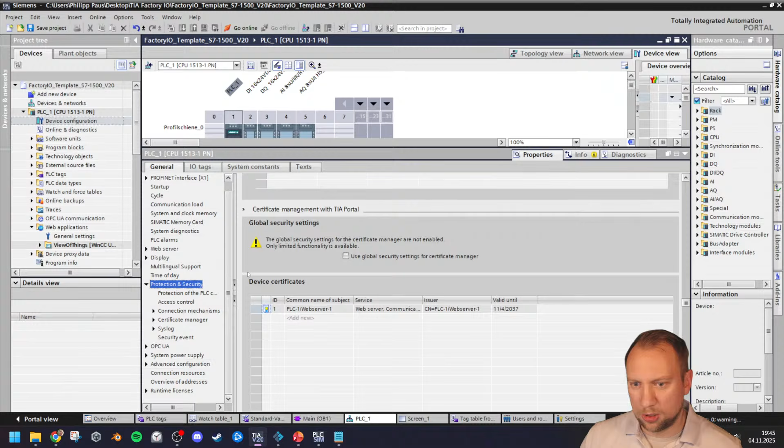All of this is fine. TIA has to be run in admin. No, this is not TIA, right? You know, this is just my web browser that's accessing this.

Don't worry, I'll have it in a second. It's got to be a web server thing, but there aren't many settings. Watch tables, advanced web server, this is fine. Entry page, start page, there aren't many settings in here.

Activate, yes, it's a security setting, 100%. No, I don't need to. We can try with HTTPS, but I doubt it. But we can try. Let's give things a try.

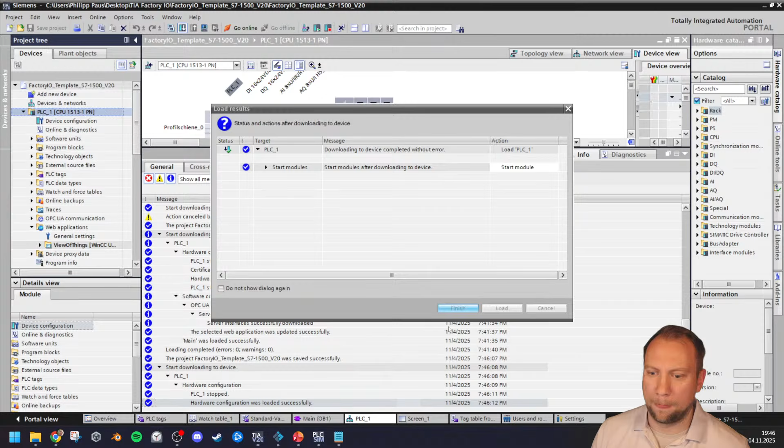If that's it, then I don't know. Then I'm confused. So now the problem is, if I type in anything, you will see things that I have tried to enter beforehand. That's why I didn't want to use Chrome.

Log out. Deal with that access. I should see all of the things. The certificate, so this can't be it. If the certificate would have a problem, I could not communicate with this at all. That's the thing, I could not communicate at all.

The thing right now is definitely that... and now I just press end stream, and you will never know. I will just change the device. So that's what I wanted to.

No, it's not the cache. It could be the cache, actually. You're right, but I tried in 2 different browsers, so it shouldn't be.

Now, what we have here is the user management, the global user management, which for me is a new topic, right? This came up with the firmware version 4.0 of the devices. This will be the way in the future, which I obviously have to look at again.

Now, what I will do is hit the right mouse button and change my PLC to the older firmware version. So this is a CPU 1513-1PN. It's this one, and I will now go down to version 3.0.

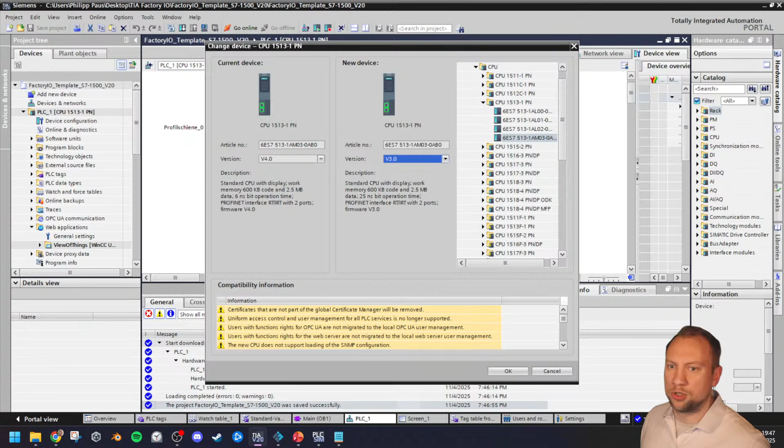Edge works, right? Following editors are closed. Yeah, I don't care, that's fine. Now I downgraded my PLC's firmware version, and now I will download it.

Of course, we have protected this now. This is kind of annoying now, but it's there. What's my password? Do I have something else in the copy and paste? I don't. Oh, come on.

It's not that I'm restarting everything because I lost the password, because the access rights don't work. Don't look at anything, everything's fine. Everything is perfectly fine.

There we go, that's fine, this is good. PLC's running. Nothing to see here, nothing to see. Everything's good, everything's fine. Now I do have the PLC.

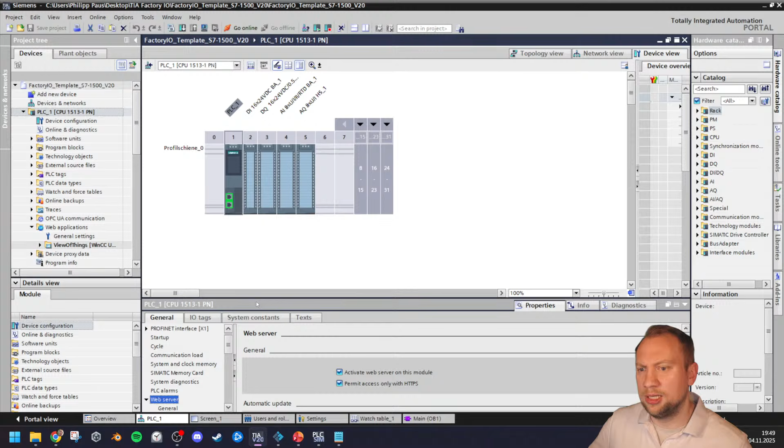Let me just now look at the access rights. Right now the protection and security, you see, is now localized, right? I went down with the firmware version. The older method, the one I'm more familiar with, is now localized, where I can just turn on full access for everyone. This is what was causing the problem. I'm very certain of it. Now everyone has full access. There we go, let me see, everyone has full access.

And with this full access, I can now also go into the settings of my web server, and I will now create a user on my web server, which I will call Philipp. Philipp has absolutely maximum access rights. There we go, and he will get the same password as before. So now it is this old method of user management. And now everything should be alright. Maybe.

There we go. Sorry, no - you don't have to be scared. This is just me setting it up. I will make a 15-minute video where I explain this process, and you will see it's not that scary.

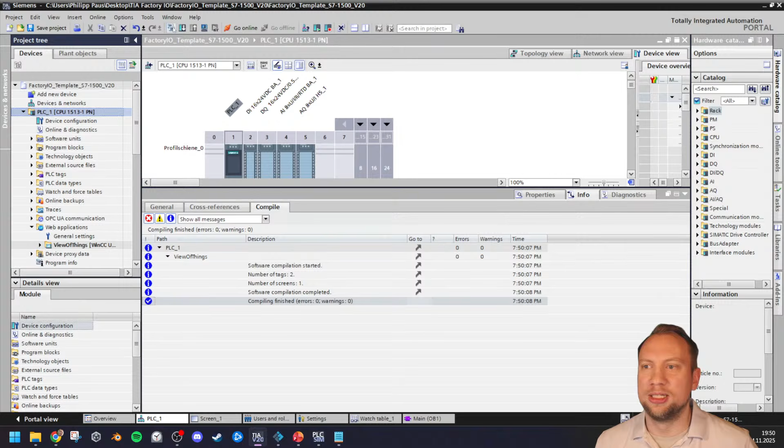It's not configured, I know, I turned that off. Do I have to? Ugh, do I? Why do I have to do this? Ah, now I broke it all. Fuck.

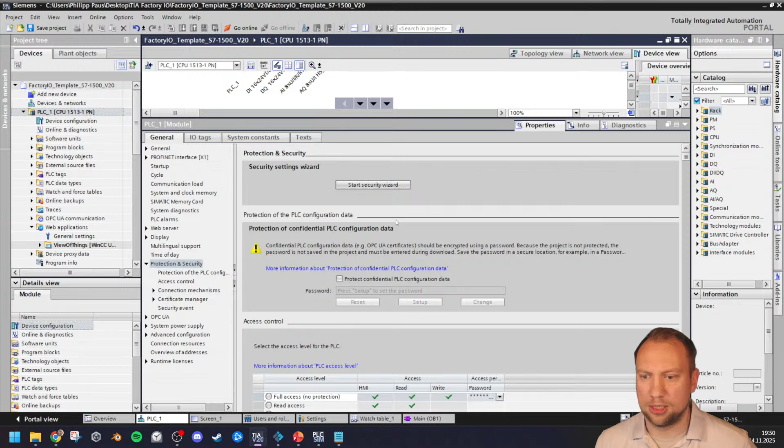Protect PLC configuration data, yeah. Certificate manager, don't care, start the wizard. No access, no full access. Everyone is allowed to - yes, there we go, perfect. Oh, this is just the warning. The server certificate was the problem. My bad, oops.

There we go, and now it should work. It will work - if not, I'll make a video about it where you will see it works. This is also something I have to sometimes fiddle around with a little bit.

And now the problem is I do not have access to the PLC anymore because I had to restart it. Now I will have the extended download, so I'll have to download this into the new PLC here, which does not have an IP address yet, but that is not a problem at all. And now I can finally read the chat again.

I'm sorry. Scared about this in a real system? Nah, as I said, it should be fine.

Simulator, your simulate runtime doesn't work. That's strange - did you select the correct component here on the left side? You have to select the correct hardware.

Now this should give me the ISO layer, yes. Okay, little learning factor - I'm using every opportunity to show you something here. If you buy a new PLC, it doesn't have an IP address. It will, in the beginning, have to use the ISO interface type here, the ISO layer, which uses MAC address. This is right now - there's two steps when you download a program to a PLC, right?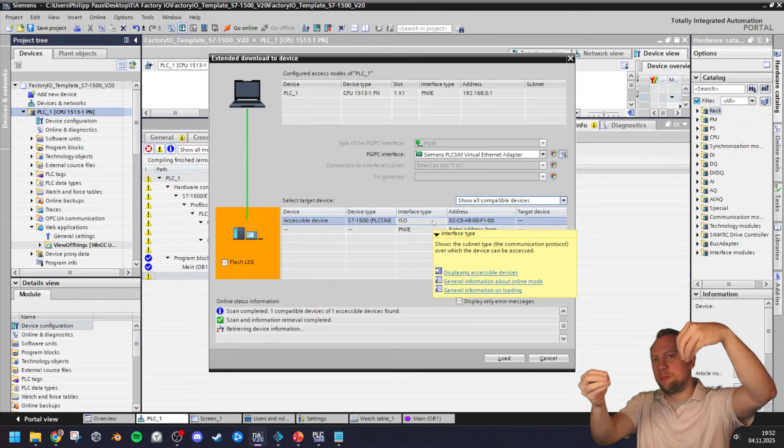The main step is, of course, you download the program into the PLC using the IP address - everything works through the IP address, that's how things communicate, right? But what if your PLC does not have an IP address? Well, that's what the other layer, the ISO layer, is for. What we do with the ISO layer is assign the device an IP address. So there's a two-layer system, or multiple layers, but we use the ISO layer to assign an IP address in the first step, and then this IP address is used to download the program in the second step. So see, I can take every opportunity, every mistake, every error, and turn it into a lecture - that is my talent, that is my superpower.

So many different layers. And I do want to download my web application as well. Thank you.

Which is actually interesting, this ISO layer - if you've ever been wondering, hey, sometimes the download without an IP address works - it never works like that. You can access the PLC without an IP address, but only on the ISO layer, only on this very basic layer.

So this is downloaded now. I do think this still connects to Factory IO, is my assumption. Should - yep. And now I do believe, and now we need to, like, fingers crossed.

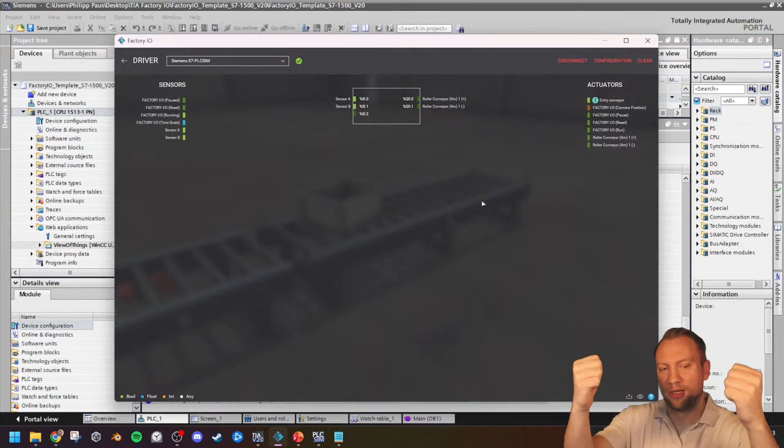That's the saying in English as well, right? Fingers crossed. In German, we say Daumen drücken - we like thumbs pressed. Don't know how you say it.

Fingers crossed, of course. Now I want to go back into the web server, where I just typed in the IP address, and I need to reassure my PC right now. Yes, I want to use this, and it is safe.

And now, big moment. There we go.

You missed the IoT - it's not really. It is an IoT thing. You're right, you're right, but it's all on there, all on the recording. No worries - Daumen gedrückt, yes, exactly.

There we go, now we're logged in. Now it works. And now I can go to my user-defined pages, to the view of things, and now hopefully, fingers crossed.

I know, it's not impressive anymore since it didn't work the first try, but I'm happy it works now. I don't know what it was with the access rights, I will look at it. That's why I had version 4.0 in the first place and tested it with that. It has to be with the access rights, but I thought I did everything correct. Don't know, but now we have our website running, right?

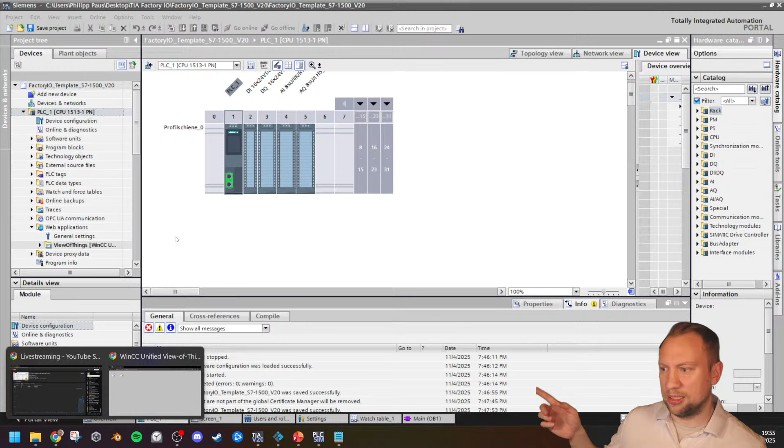No, web application is for 1200s as well. So we can create this. The VoT, I don't know actually, but I think so. The web application, all of this you could theoretically do on a 1200.

But right now you will see that it automatically scales with my browser. The buttons are tiny and I can't zoom in, it's a fixed scaled application right now. So I could make this prettier, which I will not, that's a complete topic in itself. So it only works on 1500. Yeah, the VoT web server on 1200. VoT, like this screen, you would have to create with HTML and so on your own, I would say, right? But theoretically possible. User-defined pages are possible, but not as convenient.

Now, theoretically speaking, if done correctly, fingers crossed one more time. If I activate the forward, we should be able to control the conveyor belt forward. And if we press, it's not a conveyor belt, it's a roller conveyor, I get it, sorry. And if we go reverse, we can go reverse.

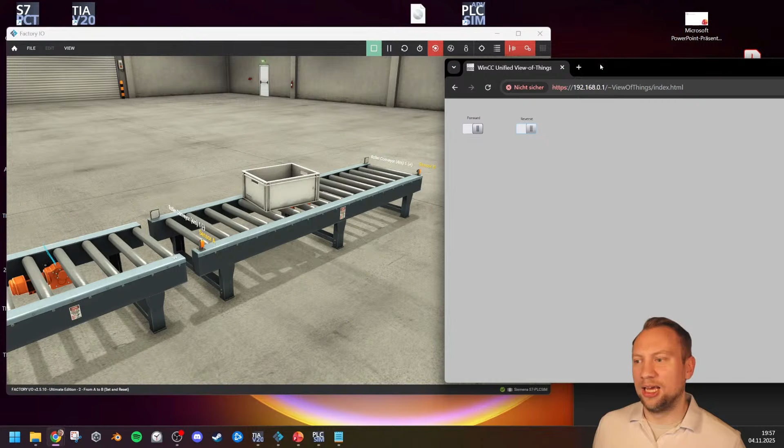And this right now, not just theoretically, but in an easy way practically, because it runs on a web server. Where are my notes? There we go. Hey there, CRC, wasn't that like some checksum error? Oh goodness, it's been long since I read those words. Yeah, it's alive, it works, yay.

Now, not just theoretically, but if I set this up in the right way, which I won't right now obviously, but I could do this browser right now. It's a standard web browser, and I can do this through the internet, not a big problem, it's not too difficult.

Welcome back. Why forward rotates? Because the box is stuck, right, it's kind of on the edge there. If I put it directly on the rollers, it should not rotate. There's physics involved in this simulation.

Yeah, so this is possible through the internet, this is standard internet protocol, standard, this is normal TCP IP. So we could now have this. The VoT is a new feature. I think it is possible in TIA Portal version 19 if you have a firmware version 4.0 PLC in there, but you have to update, you have to have a service pack. So at least it's a service pack thing.

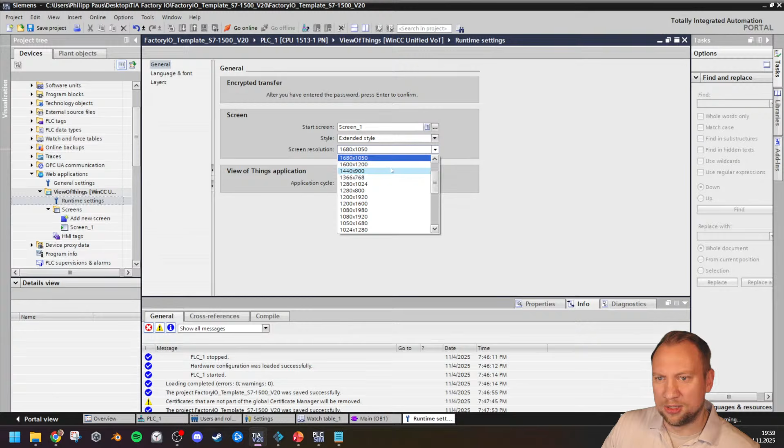But I could, of course, go on the screen and make those buttons much larger. You see, this is what the web browser tries to scale now, which, if it runs on a web browser, doesn't really make sense to keep a 16:9 formatting. I don't know what the format here is, but... 1920 by 1080 is 16:9 format. So of course I can make those bigger as well if I want to, and stuff like this. Like this is just the text, but we could do many things.

Of course, that's how it should show on the screen now. But if you use version 4.0 in TIA Portal 19, as I said, it should be possible. I don't know, I use TIA Portal 20 right now, but it should be possible in other versions as long as you install the updates and service packs.

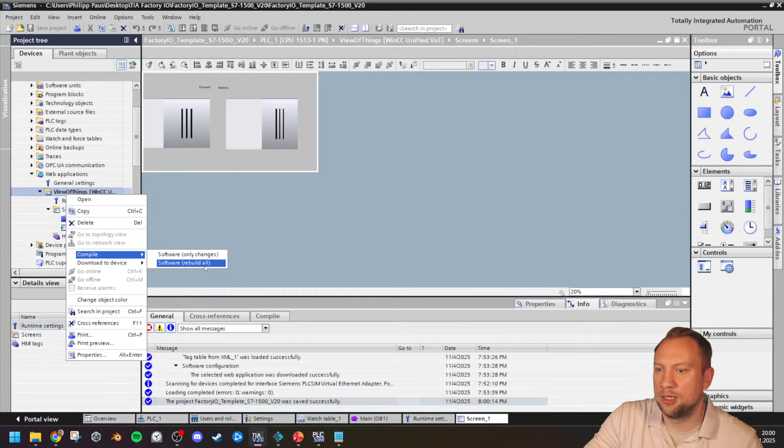So I have to compile and rebuild everything because I made changes. And now when I want to download to my PLC, I have to also re-download the web application with it. This is kind of annoying that I have to do this every time, but it's okay.

I've tried in kiosk mode. What is kiosk mode? I haven't. What is kiosk mode? How do I do that?

And now in my web browser, I would also have to reload this, relog in because I made... Whoops! What is this? Why am I printing? I don't want to print.

I don't even know what I pressed to print. What's my password again? Copy and paste. And now we have the buttons, and now we can control the thing. I mean, we could control it before, but now it is prettier. It's better.

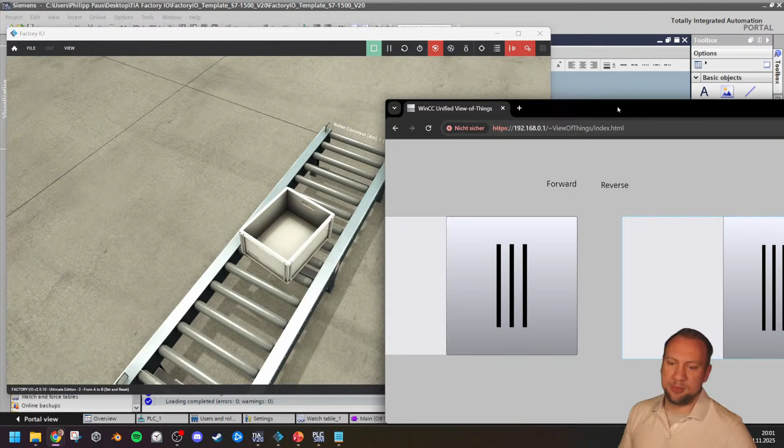Why is it better to use an HMI? You don't have a standalone device right now. It's not better, it's different, I would say. Right now, we don't have to have a standalone device for the HMI. All of this is installed inside of the PLC. We don't need any additional hardware for this. Everyone's got a cell phone. This could be on every PC that you have in your network. You don't need a standalone device anymore.

You can, however - there's WinCC unified panels, and they have their own process. But right now, this is, you just have a PLC. You don't need to buy a dedicated HMI. Pretty good. And you don't need to run TIA Portal or so. It's just a web browser, just this thing.

Yeah, of course, now designing and styling all of it. Not opening that. Is there a limit of the VoT size? Yes, there is. They are quite limited. The View of Things application is very limited even. It's not a full HMI, I would say.

It is quite limited in the amount of power tags you can use. It is limited in the file size in itself. It is quite limited, yeah. I think the VoT is exclusive for 1500s. Not 100% sure, this I would have to Google as well.

Yeah, I would say you don't really need it on 1200s. I mean, it could. I can just look, now I'm interested as well. Let's choose a G2, let's choose this one. This one's probably available. No, what the frickety dickety. I'll just choose a new one. And let's see.

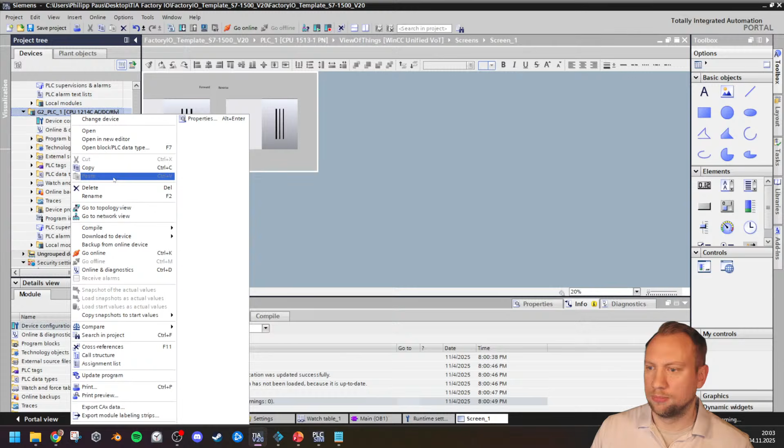This does not have the feature. Nope, simple as that. Yeah, I mean, it could be useful in a 1200, I would say, but no, it doesn't seem like they do. Oh, there's a bigger one, which has firmware version 4.0. There it should, yeah. No, it just has... no, it has web API. It has a web API, but it doesn't come with the convenience feature. I would call it the convenience feature.

Yeah, it's like Silent Sniper says, you can not just theoretically, but practically program your own websites. So it is possible to have the same behavior, but it's not conveniently embedded in TIA Portal here. It is for smaller things. I wouldn't put it like as Tran says. I would not have this in a big industry project or so. This is for smaller scale stuff, like troubleshooting and getting some machine signals or so, like for smaller stuff.

It's still a nice thing. Just wanted to show you some feature here. That's cool, VoT is only 1500. Yeah, apparently, I didn't know, but now I'm pretty sure.

Hey Sammy, yeah, there we go. I'll save this. So the last part here with the user administration, I will have a look at the user rights. Maybe next TIA Tuesday we will talk about user rights, about this whole mess of the user and roles, about the security settings. Now I have an idea, because that's where I messed up a little bit there. Sorry, but along the way we learned a lot of things. That was still fun, I still had fun.

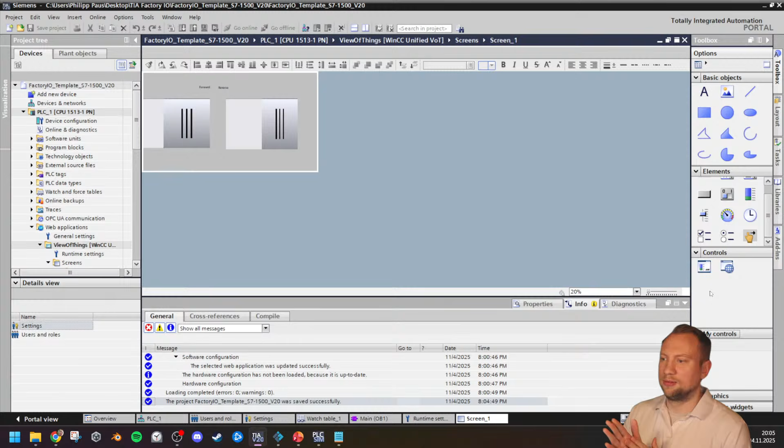Good, okay. So before I start another topic - and I had this prepared, so I thought this would work, no problem - the user rights, I will have a look at it, but we will learn and we will be able to adapt to it. But right now, I want to keep those TIA Tuesdays to like 1.5 hours or 2 hours in total. Yeah, that's what we have reached now.

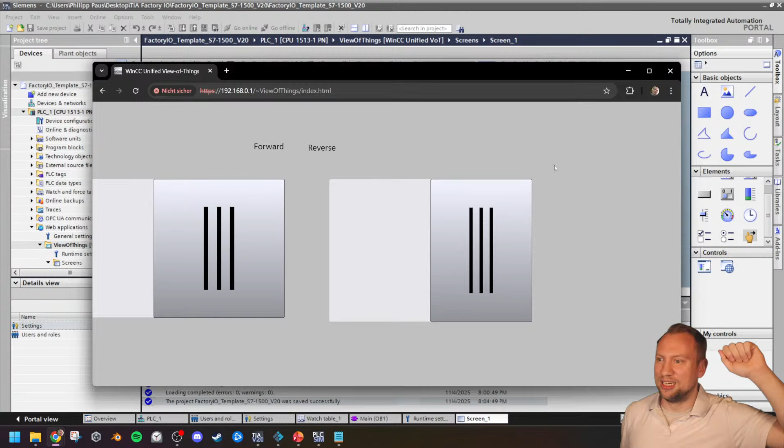MQTT, ooh, that's an interesting topic. I'll write that down. Now that I have a template, let me put that here: Topics - MQTT. I haven't done that myself, but I know it is important. I want to put it in the same category as OPC-UA. Well, it's not the same, but like putting it in the same area there.

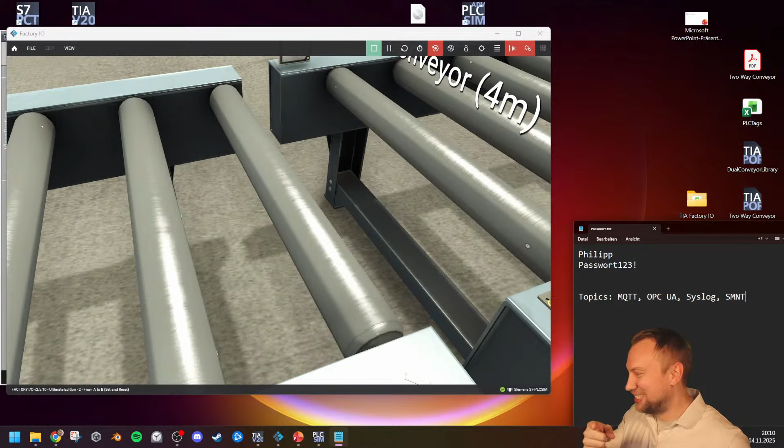Every Tuesday, 6pm German time, for 1.5 to 2 hours, with different topics, all in the area of TIA Portal.

Node-RED, oh, I haven't done Node-RED in a long time. Ooh, SCL, yeah, that's a good one. Oh yeah, nah, I'll wrap this up. But actually my first plan was to do something SCL related today, so maybe that next time. Maybe that, we'll see.